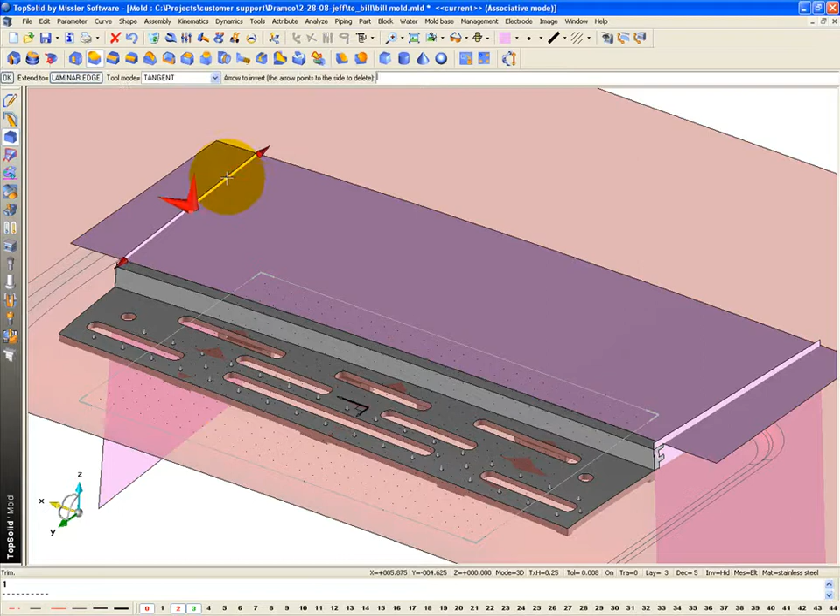Okay, so now we're going to start trimming all this up. I'm going to start by doing some reciprocal trimming. Use that as much as I can. I want to trim that face to that face, getting rid of all of that, this face to this face, and all of that. Okay?

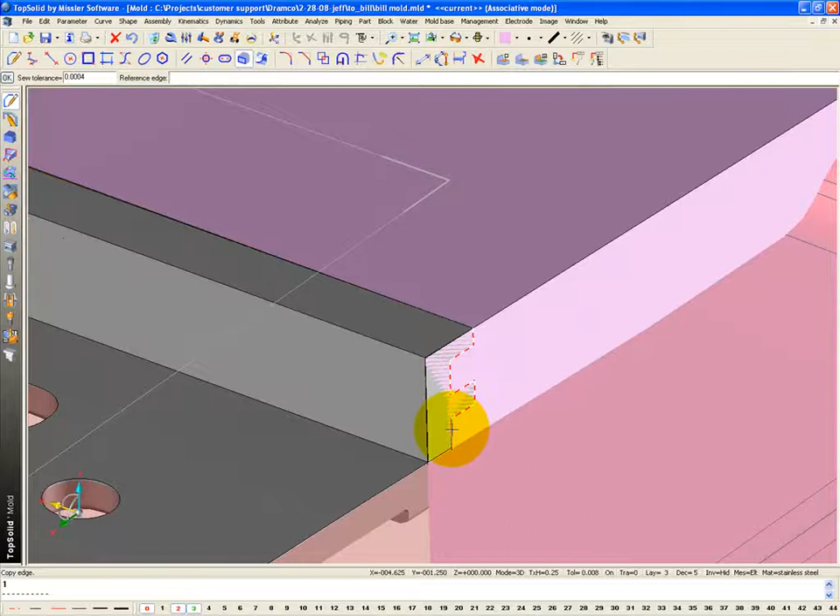Now we need to work on this area in here. So I'm going to go ahead and go copy some edges. I'm going to do it as edge path even though they're not tangent. It's okay. It's good for me. I'm going to go ahead and do this on the other side as well.

And let's see what happens if I just do trim by shape. Get rid of that side. It's kind of what I thought would happen. Because it's on the side, based on our plane, it's not going to want to do it. So here's what we're going to do.

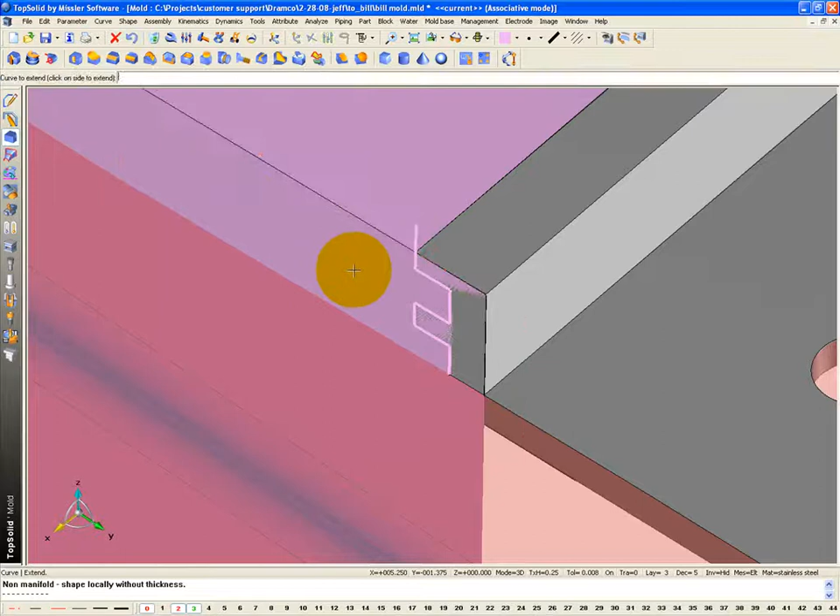We'll curve extend. We'll select that side, make it a little bit bigger. Select that side, make it 5 inches. Something that's truly going to extend past the bottom. Do the same thing on this side. That we'll say is 100.

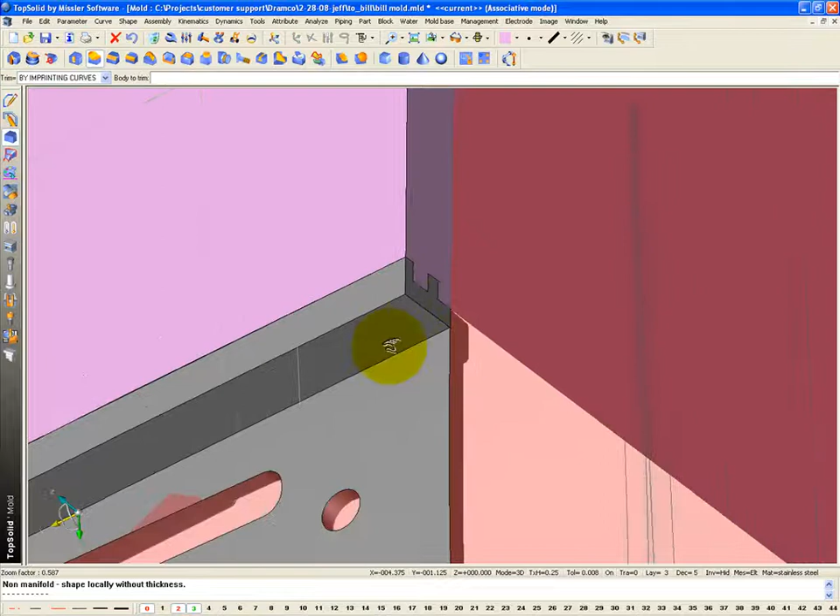And let's go ahead to trim by imprinting curve. Trim that surface by that curve, getting rid of that side. We're good. Okay, let's trim this by this curve, getting rid of that side, and we're good.

Okay, so now we got to bring this all together. Now before I do, I'm going to go ahead and sew this face and that other face together, because it's going to make life simpler. Do a quick copy boundary edges, make sure it's looking good.

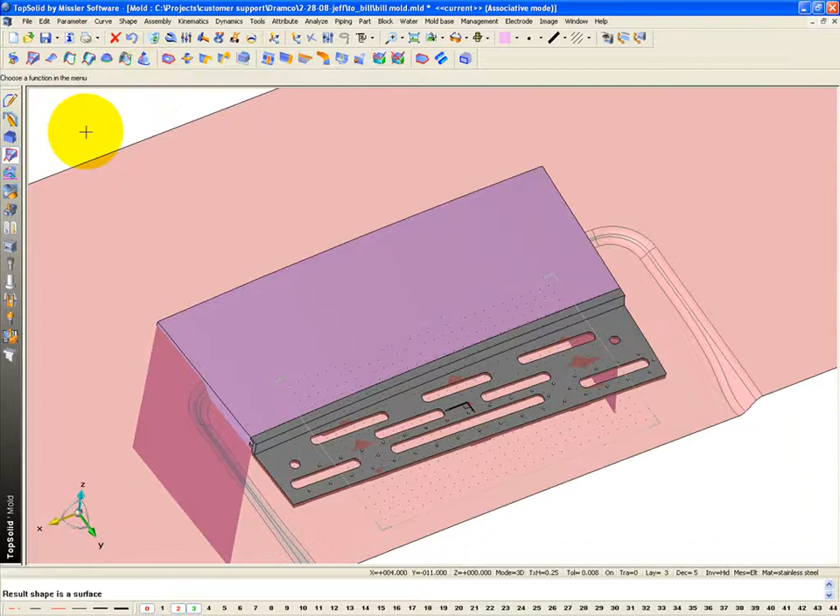Okay, now according to, again, the block that you had created in yours, you were coming back this way from 0, 3 inches. So I'm going to do the same thing. I'm going to create a quick little curve, maybe I'll use a polar line in this case. And I'm going to say it's polar, it's going to be 0 degrees, centered.

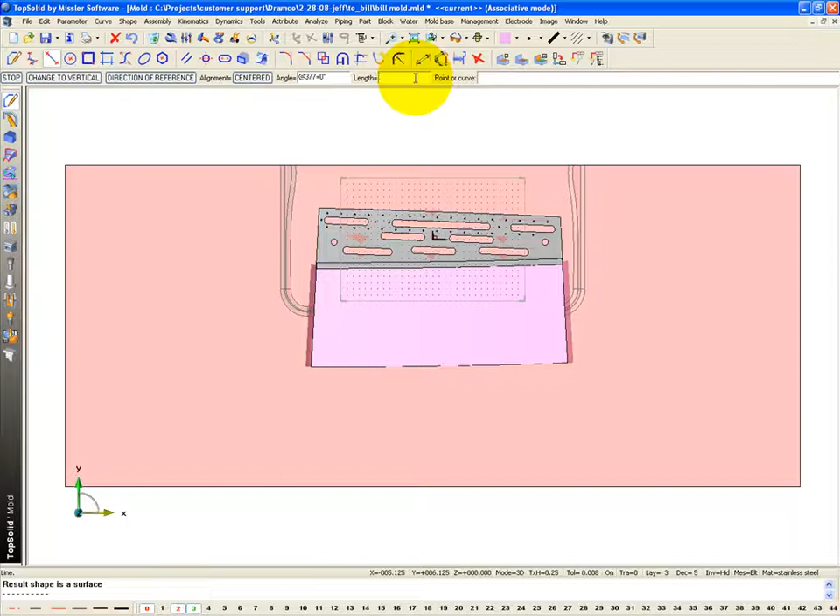I'm going to make it, I don't know, 12 inches. And it's going to be at 0, -3. If you want, you can put a driving dimension on that point so that you have that location. And now I'm going to extrude this surface, or this curve, just as a planar little sheet.

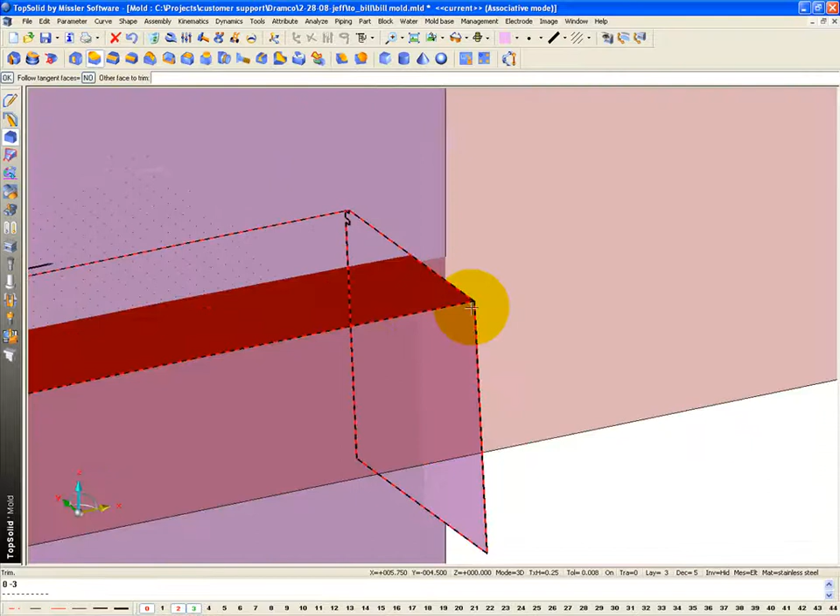And now I'm going to do reciprocal trimming again. And this is why I sewed together all of these other faces first. When I sewed this and this together, it's so that I could use it in the reciprocal trim. So that's that set. I'm going to select this set. And we want to get rid of that side and that side. Looking good.

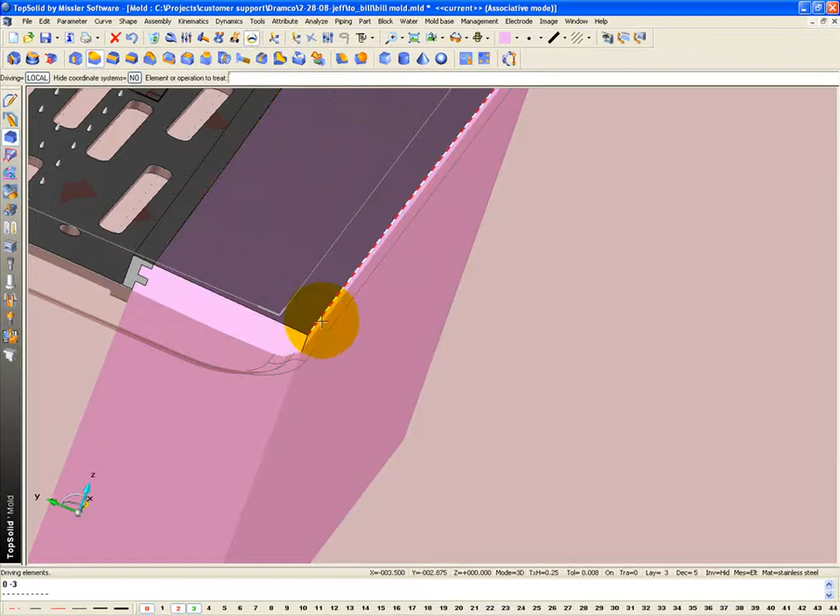Okay. Now, in looking at this based on how I made this blend, maybe we need to shift this a little bit. So let's bring back the driving elements of that. We have our -3 inch value. Let's make it -3 1/4. Good enough. Hide all that. Oops. Wrong one. Hide all that.

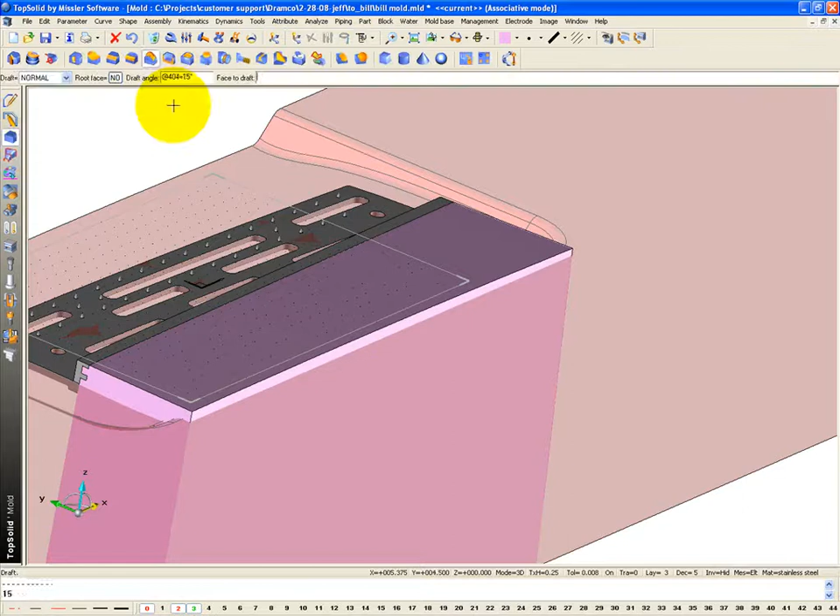Okay. And even I'm going to sew that together. Why not? So that and that face together. Because maybe here we want to add draft as well. So I'm going to go ahead and add draft real fast. 15 degrees, why not? That face.

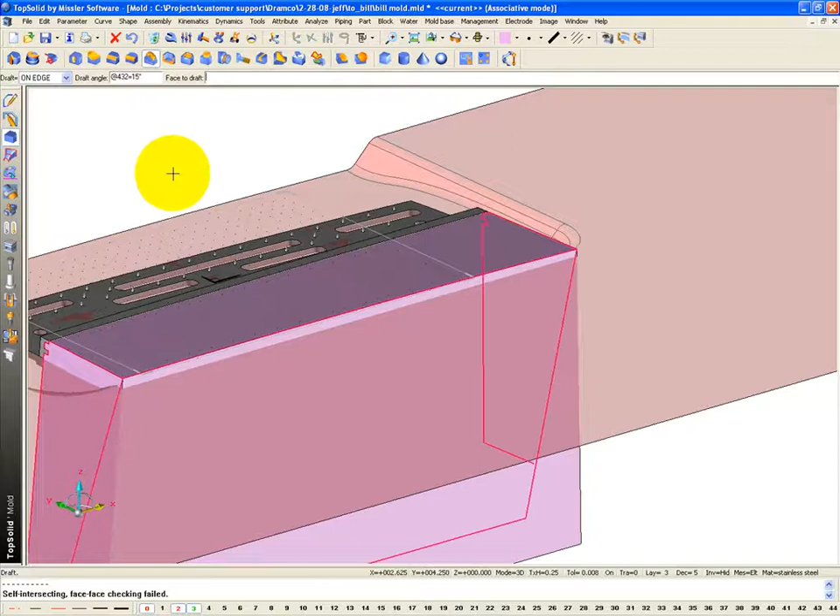I forgot that's not a planar face. So if we wanted to add draft to that, we would have to do it as a draft on edge. Just to show you how that works, if I go here to on edge, 15 degrees, that face, maintaining that edge, compute draft, Z positive is our mold open direction. Oops, Z negative, there we go.

Now we've maintained that 3D edge and we've added the draft to the surface model. So in the next video we're going to finish trimming everything, and away we go.